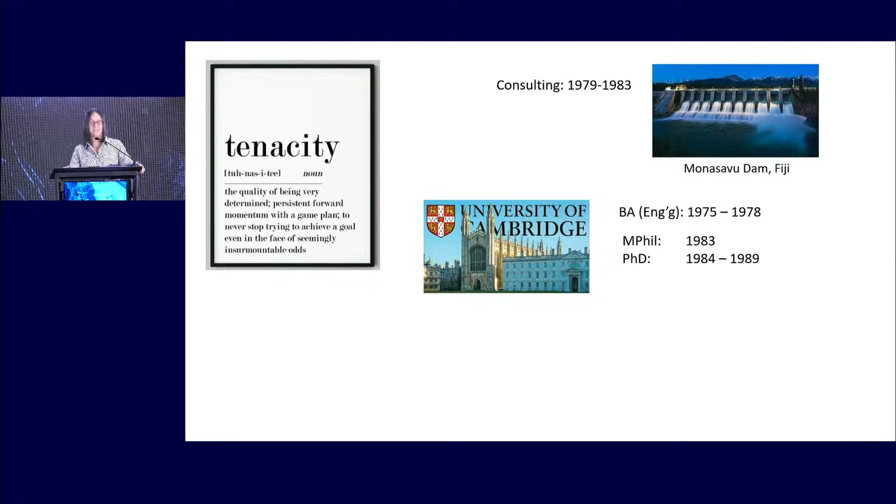Now, you may be aware of the college system in the UK, where you're not only admitted to an academic department, but also a residential college. There have been, for many years, colleges that didn't accept women, and in 1988 the last college to accept women was Magdalene College. That same year, Sarah became the first female research fellow at Magdalene College, where she helped transform that college into the welcoming educational space that it is today.

She stayed at Cambridge as a lecturer until about 1997, where she made what she calls one of her most important career decisions: to leave Cambridge and go to the unknown at ETH Zurich, where she was the first female professor in civil engineering, and from what I understand, also the first and only female professor of geotechnics in Western Europe. So she was really putting her stakes down. Ultimately, she was appointed rector of ETH Zurich in 2015.

Now, this shows her tenacity in the technical world, but she also has another side, and that's the athletic world.

Sarah is an accomplished and world-class triathlete. You didn't know I could use the internet. Look what I found.

She was a member of the British triathlon team. She won multiple European and British triathlon championships between 1984 and 1993. She ran the Hawaiian Ironman triathlon 5 times, coming in 5th in 1985. This is where my colleague Brady Cox, when he first heard me talk about Sarah, said, she's a badass. And that is so true.

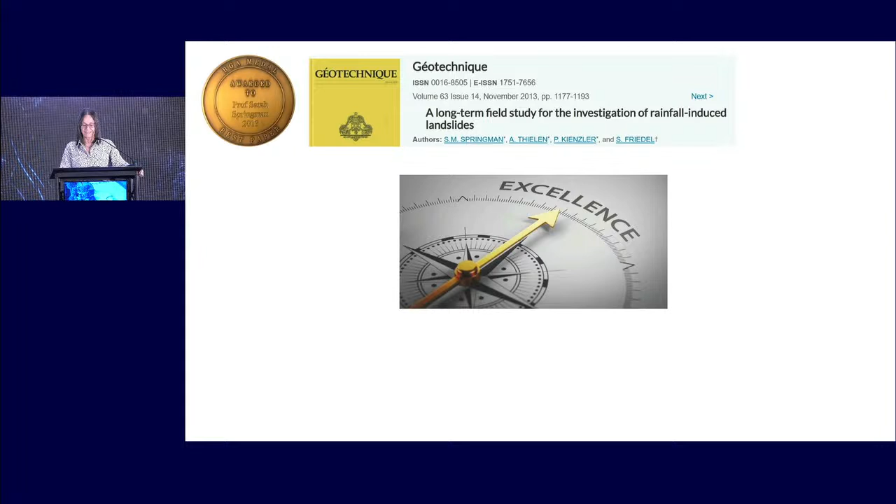Later on, in 2022, she was a co-author on a paper that received the Stephenson Medal from the Institution of Civil Engineers, again working on rainfall-induced landslides. She holds 5 separate honorary doctorates from universities in the UK, Australia, Switzerland, and Belgium. She's been the Cross Canada Lecturer, the Croce Lecturer in Italy, and the other Terzaghi Lecturer in Austria.

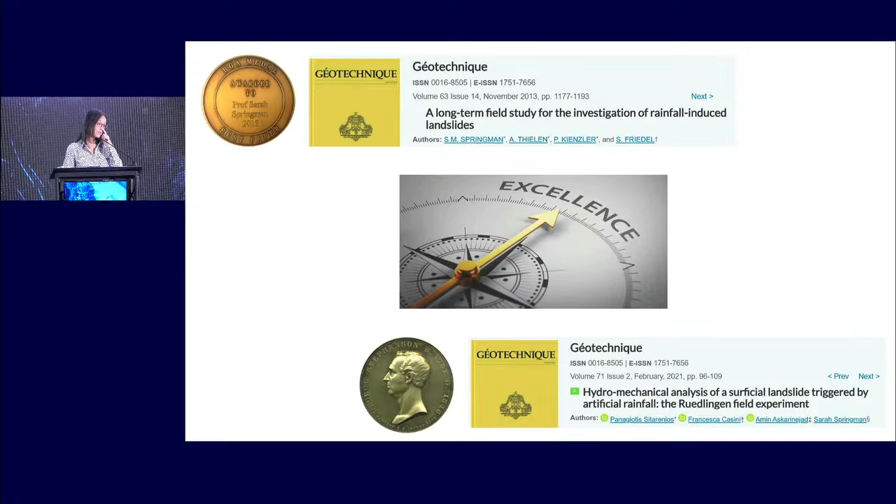Now, I know this is a long introduction, but I have just one more slide, because in putting together this nomination for Sarah, I received the most inspiring letter of support from Professor Andy Take at Queen's University in Canada. He describes Sarah as one of his personal and professional heroes, and much of the introduction information came from his letter. But I figured I'd just simply read the end of his letter.

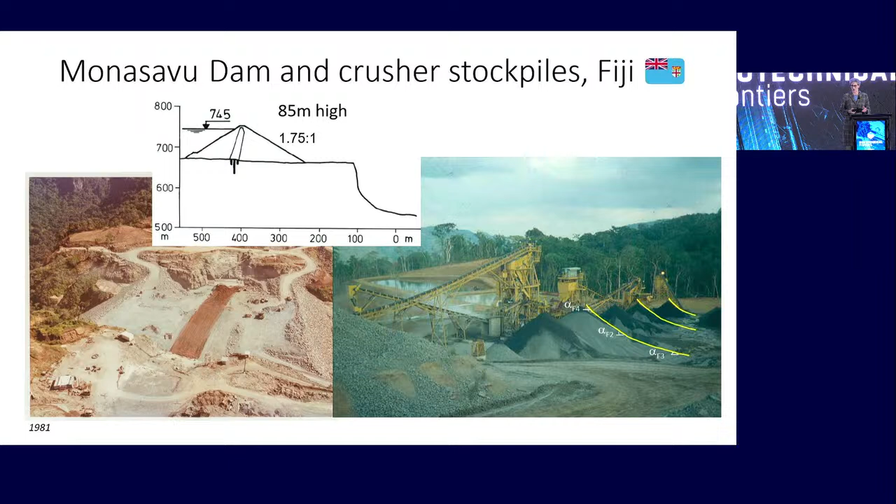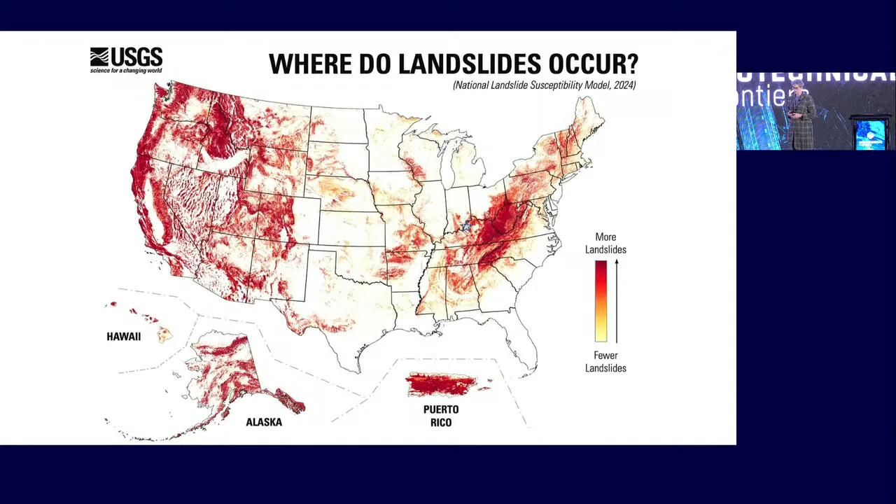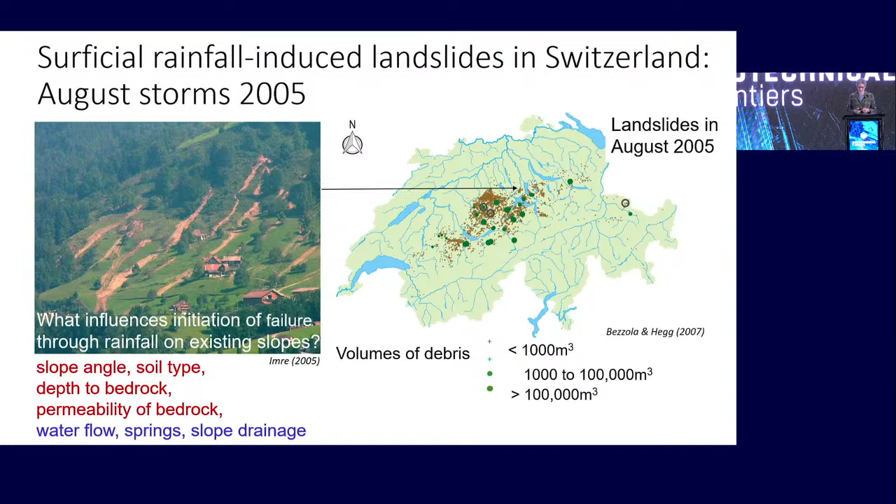What happens to the slope when it rains? And then where, when, and how much of it will fail? These aspects are important, so let's discuss that. And what's the question, and how will we answer it?

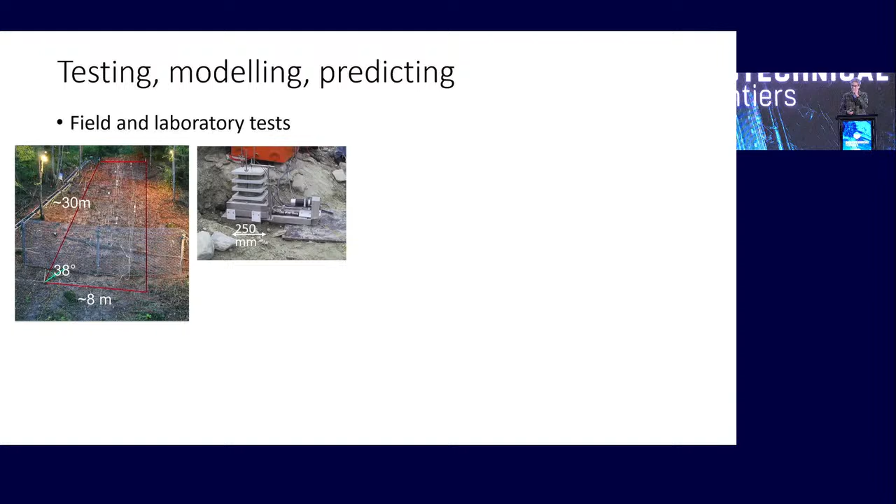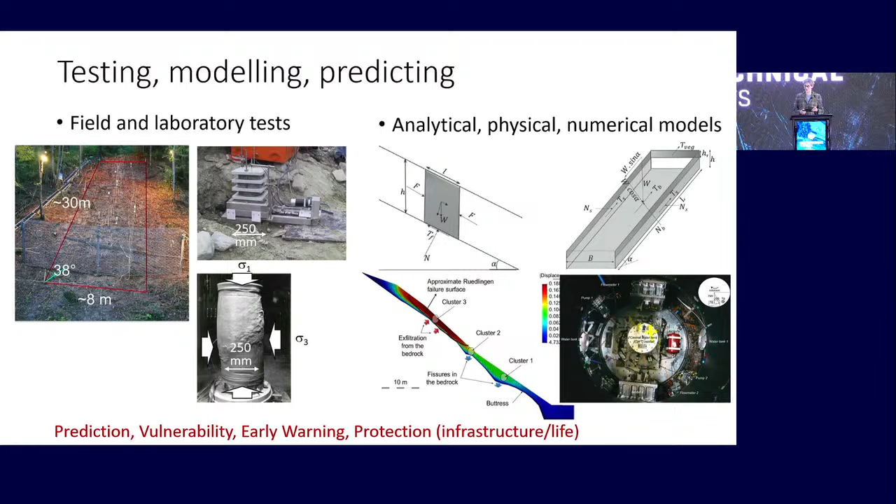I'd like to share what we've learned from field and laboratory tests here, a 38-degree slope, instrumented, in situ shear boxes, large-scale triaxial tests, with analytic approaches, equilibrium, physical modeling, and centrifuge modeling, and numerical modeling as well, to aid the prediction of failure, to be able to design early warning systems, quantify vulnerability, establish risk, and ultimately protect infrastructure and lives.

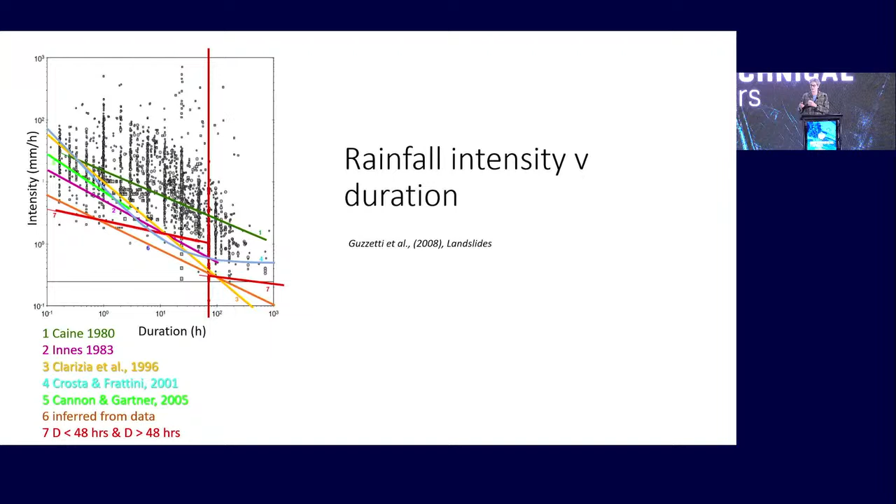The animation shows us basically what's happened. So for probabilistic predictions of rainfall-induced landslides, here are also presented different rainfall duration intensities, completely wet or dry soil, a range of soil depth models, and also statistically based soil parameters. The authors took factor of safety limiting cases using the infinite slope and determined unconditionally stable regions, conditionally unstable regions, and unconditionally unstable regions in red. You can see the trends and the variations depending upon the assumptions.

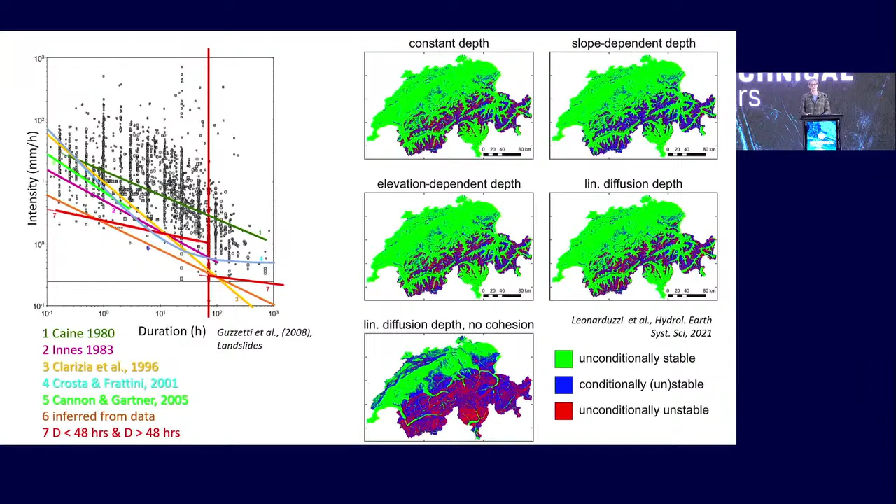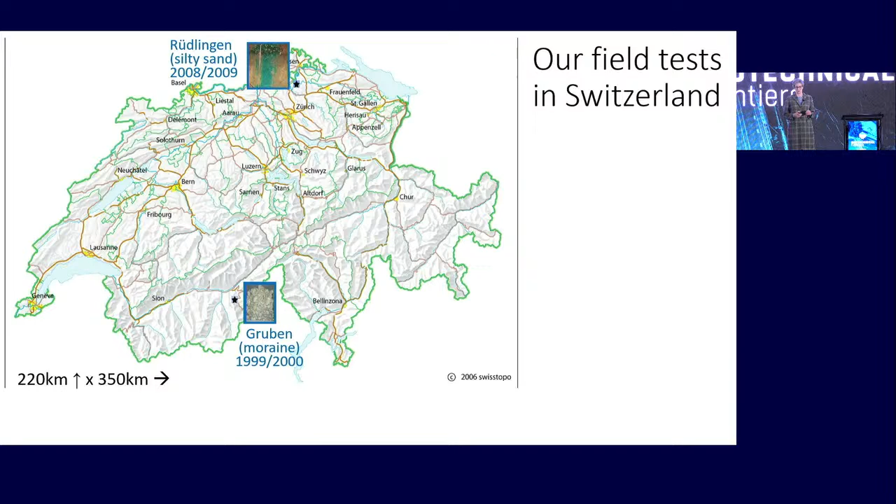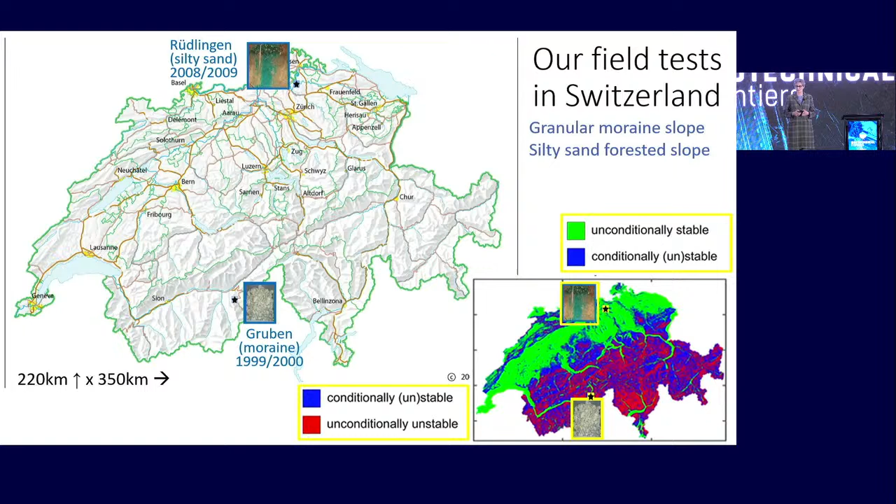I will refer to that later. So my group has conducted multiple field tests around Switzerland. The two main sites I will use to illustrate my points today were each tested over 2 seasons. The first is a granular moraine slope in Gruben, and the second a silty sand forested slope in Rüdlingen. You can see that Gruben is located in the potentially unstable zones, or the conditionally unstable zones, in the south, and Rüdlingen in the unconditionally stable and the conditionally unstable zones in the north. I'm going to mention briefly additional learnings about the influence of bedrock and that of vegetation.

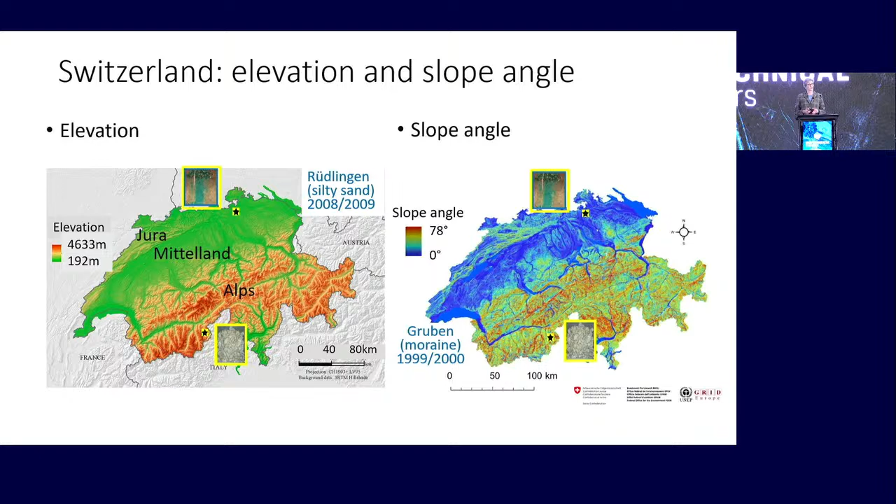2 important influences here relate to elevation and slope angle. We can see the older Jura mountains running from southwest to northeast, and the younger Alps in parallel to the south of the Mittelland, which is shown in green. Gruben is located almost 3,000 meters above sea level on slopes at large scale, steeper than 30 degrees, whereas the Rüdlingen slope is relatively low-lying in the Mittelland and with steep local slopes along the River Rhine.

So let's put this into context. Here we see data records of recent landslides in Switzerland from 1997 to 2005, plotted as a percentage on the y-axis, a number in each group you can see in the legend, against the slope angle on the x-axis. Slope angles vary from steeper than 16 degrees to about 50.

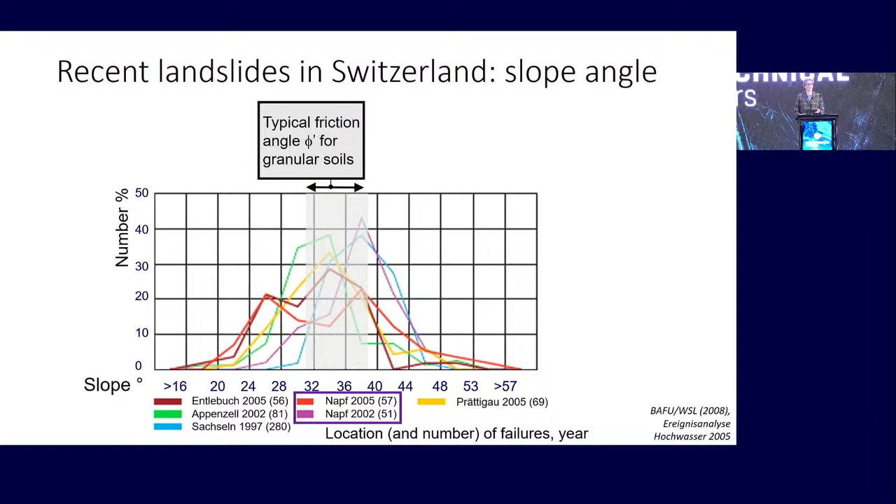One site experienced storms in 2002 and 2005, that's Napf, and trends are similar when you compare red and pink plots. We can observe that slope angles are similar to the typical friction angle for granular soils, whereas some much steeper slopes clearly rely on additional help from vegetation, suction, and cementation. Some shallower slopes fail too, perhaps through seepage in the slope or soils that are fine-grained with clay. In summary, slope angle relative to the friction angle is important, but it's not the only factor.

So let's put this into, let me go back one, sorry, I'm too quick again. Let's do a small digression as a thought experiment in very basic uncoupled soil mechanics. Importantly here, friction is not fiction, whereas cohesion may be. If we have a reliable friction angle mobilized at large strain and shearing at constant volume, phi-CV, then the stress state of an element in a slope in a state of incipient failure might plot as shown in black.

But guess what? This is not always the case. Stress states are often more critical than this, as shown in red, and it would be steeper than an angle alpha equal to phi-CV. So if this slope is stable, then additional strength may be obtained from other sources.

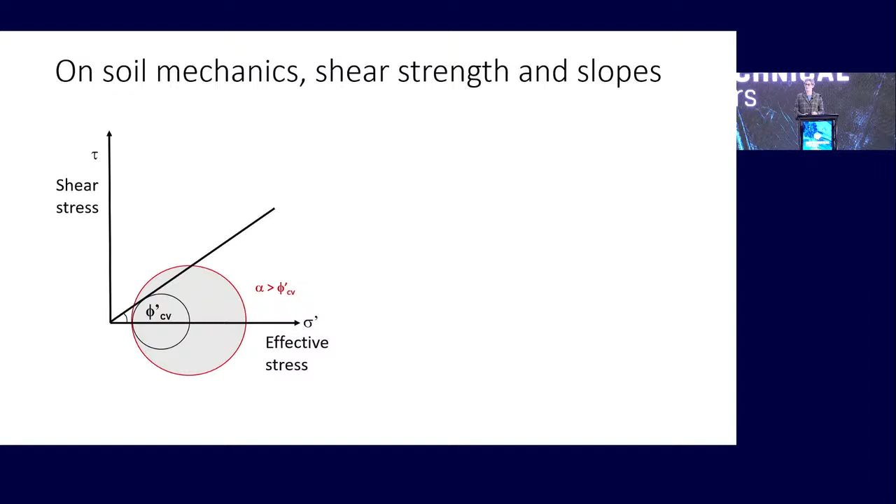For example, if the slope was lightly cemented, then a small cohesion, for example delta C dash, might be mobilized, increasing the failure envelope, as shown in brown. Should there be reinforcement of soil due to roots, then perhaps there might be a delta C dash R, as shown in green. And finally, suctions could also be enhanced by a simplified determination in which the effective suction can be modeled by a delta C star, as shown in blue.

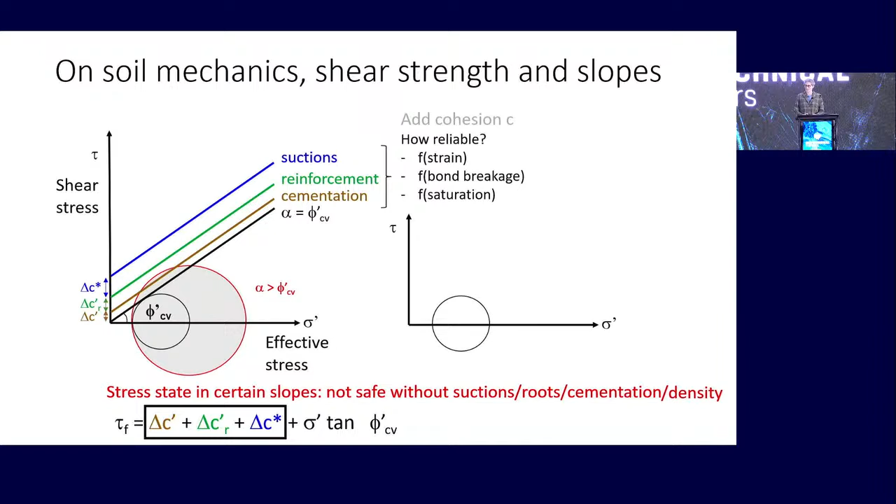So essentially, we have the equation at the bottom there that could be valid, and as such, a net cohesion could be modeled according to this equation. But it's not very reliable, is it? It can be a function of strain, bond breakage, and saturation.

An alternative model might introduce a higher friction angle by an additional value of dilatancy, psi. This could be less likely to model cementation, but might represent the effects of reinforcement and suction. This dilatancy model is also very valid for dense soils. This simplified, uncoupled net failure criterion would then be amended as shown, and can be used with very simple models to make first assessments.

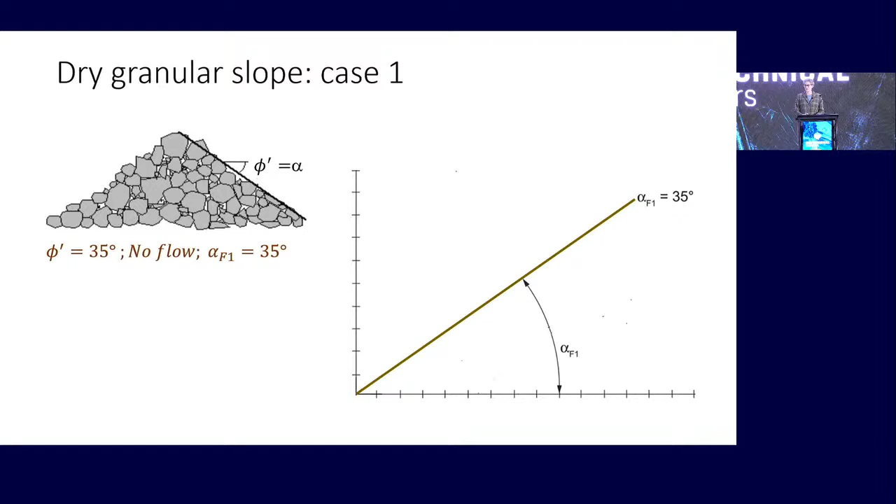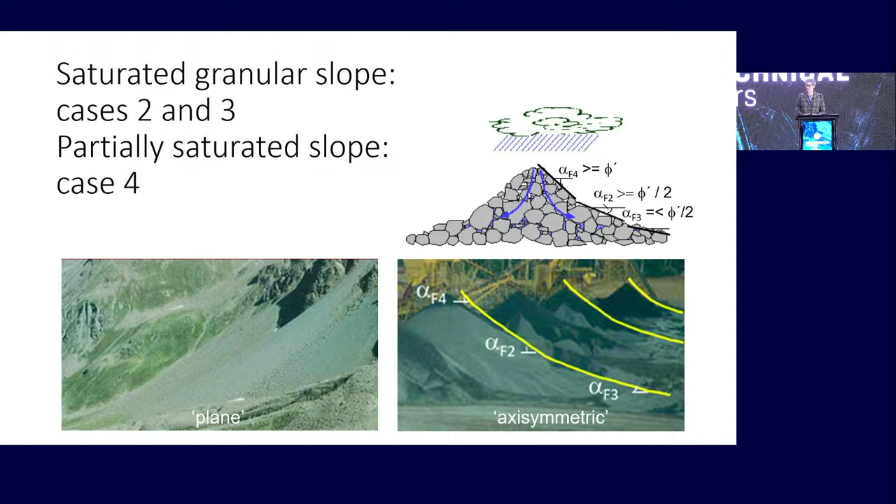So let's relate this to the state of saturation and flow in a slope. We've seen many examples of dry granular slopes representing a mobilized angle of friction, phi dashed. If the slope is dry with no water present, that's case 1, and the angle of a slope in a state of incipient failure is alpha F1 equal to phi dashed. If saturated flow passes through the voids, the slope angle alpha F2 for flow parallel to the slope, case 2, is often roughly half the angle of friction, whereas for horizontal flow at the toe, case 3, the slope angle will be flatter. When the slope is partially saturated, suctions increase, effective stress rises, and the slope angle becomes steeper, identified as alpha F4.

This reminded me of Karl Terzaghi's emphasis on simple formulae for factors of safety in an infinite slope. Imagine parallel flow in a fully saturated slope, with streamlines in blue, equipotentials in purple, and a standpipe in turquoise rising from a shear surface at depth Z2, parallel to the surface, at Z2 cos squared alpha. Now consider horizontal flow with a standpipe rising to the full height of Z2. Assuming no cohesion and a phi dash of 35 degrees, the pore pressure is lower in the parallel flow case than for horizontal flow, meaning the effective stress at a slope in a state of incipient failure is alpha F2 at 19.3 degrees, whereas it's 1.8 degrees flatter for alpha F3.

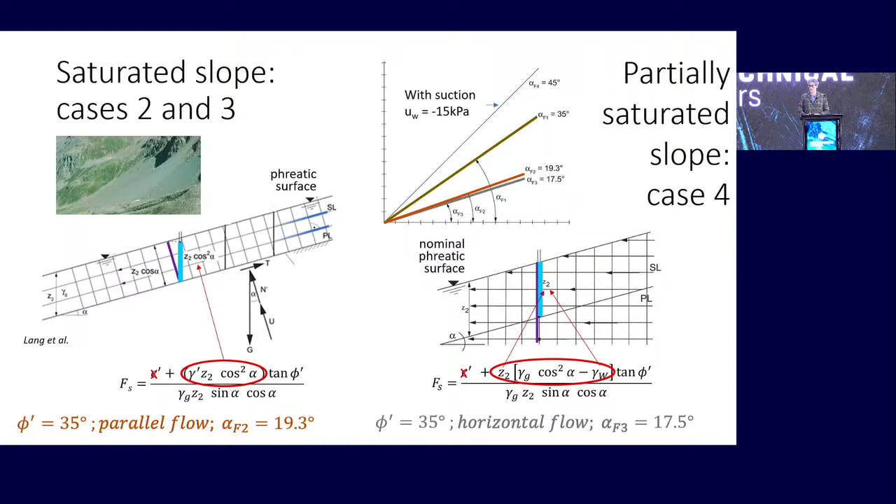Plotted as a slope with respect to the dry case, we can see the respective slope angles. And should there be a suction of 15 kilopascals, then the partially saturated slope angle, alpha F4, goes to 45 degrees.

Now considering the interface between saturated and unsaturated flow, let's look at how the slope saturates, leading to a rainfall-induced landslide, through preferential flow perhaps, or through infiltration. In an excavated infiltration test conducted by postdoc Peter Kienzler, the northern site shows preferential flow through root holes, largely with partially saturated soil around that had not been dyed blue. This leads to the water table building up from the bedrock at depth, called bottom-up saturation.

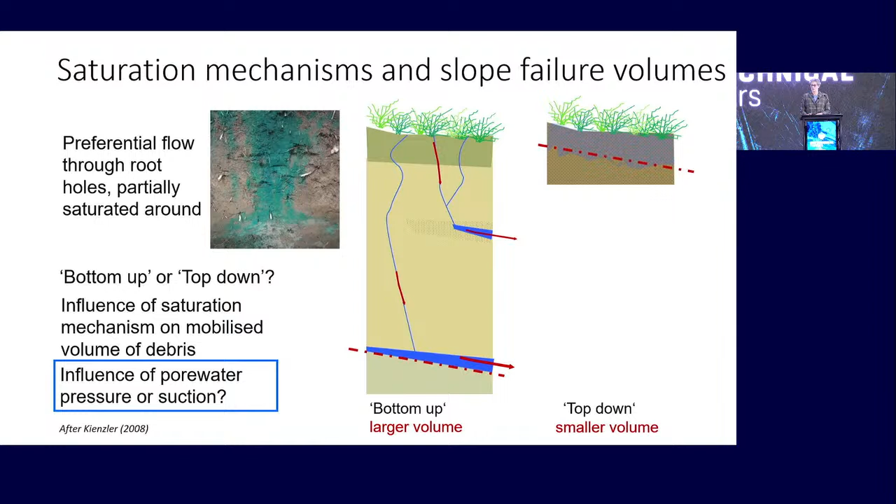Should rainfall infiltrate and saturate the soil from the top down, this influences the mobilized volume of debris, which is much smaller for top-down saturation than for bottom-up saturation. The larger volumes also often run out further, making them more dangerous. We'll see both of these mechanisms in the two field cases, and this affects whether we're talking about suctions or pore water pressures in the main soil mass as well.

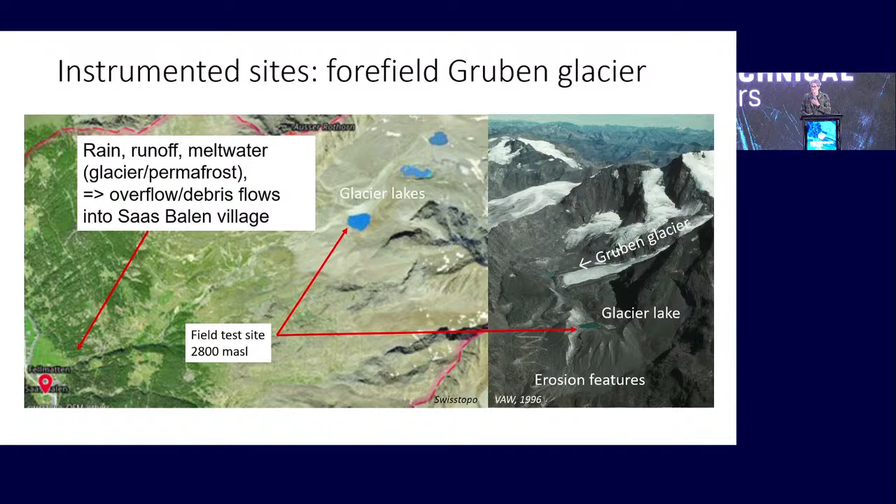So now to the south. The Gruben Glacier, shown on the right-hand side, has retreated markedly, leaving behind a moraine bastion in the forefield with several glacier lakes collecting summer meltwater. These have overtopped the moraines and led to severe debris flows in Saas Balen village in the 1960s, before control weirs were constructed. Philippe Teysseire was charged by the canton's geologist to investigate slope stability in moraines, and this became his doctoral research project.

Here's an elevation of the moraine bastion and the slope in the forefield to the Gruben Glacier. The soil conditions were extremely heterogeneous, but there was a significant fine fraction that retained suctions. We wanted to link saturation, water flow, slope stability, and debris volumes mobilized due to rainfall.

We instrumented two slopes to determine saturation degree, measure suctions and rainfall intensity, among other quantities. Water fed flowed from the glacier lake above, and it was a very challenging environment at almost 3,000 meters above sea level. The test area on the 31-degree slope did not fail in either '99 or 2000, whereas a smaller one on a 42-degree slope failed sufficiently.

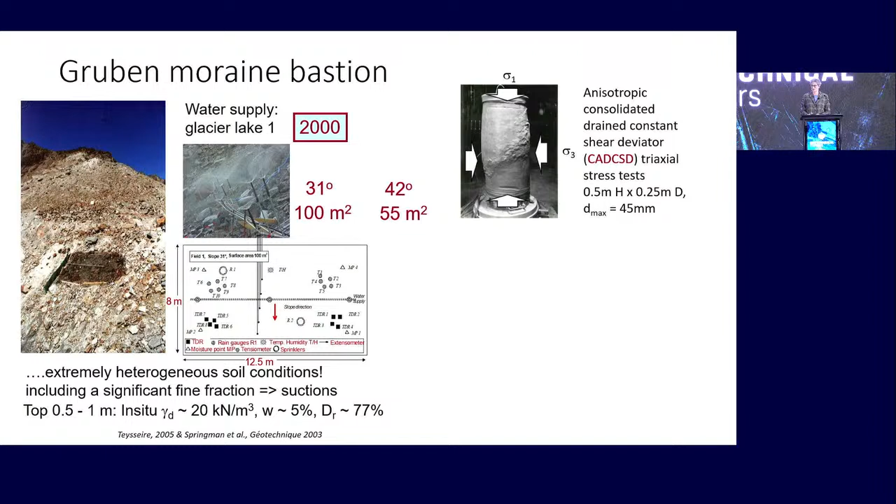We investigated the angle of friction on reconstituted specimens in large triaxial tests of 250 millimeter diameter, with maximum particle size of 45 millimeters, conducted to model increasing pore pressure with an anisotropically consolidated constant deviator stress path, and then in-situ shear tests on naturally unsaturated soil, with friction angles ranging from 39 degrees in the triaxial test to 41 degrees in the shear box.

And of course, that explains to us exactly why the 31-degree slope was safe and the other not.

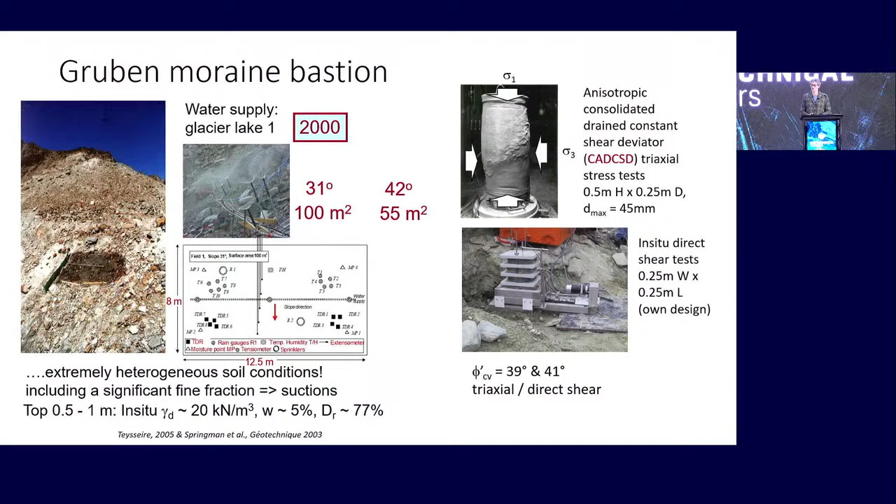One of my colleagues said, 'Sarah, what, you want to bring the mountain down?' He was a hydrologist, because it was more than the 1 in 500-year storm. I can't do the Italian accent very well, I apologize.

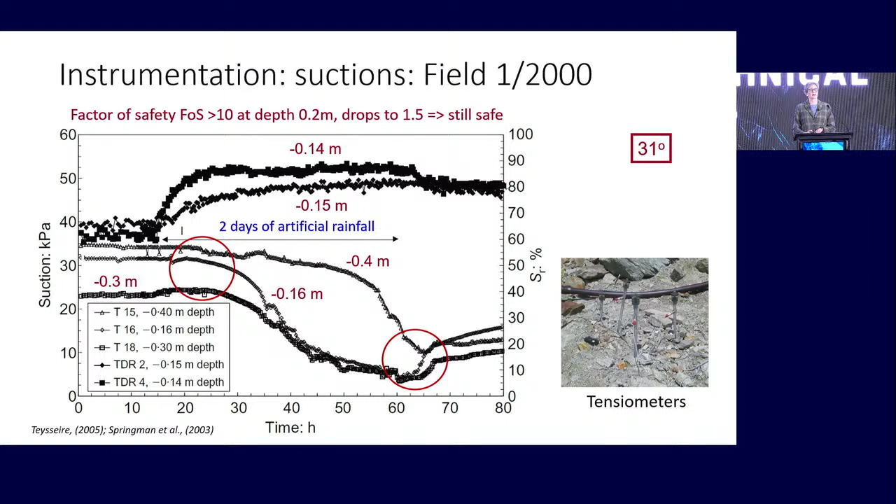Here we combine data showing saturation degree, almost reaching 90% at 14 centimeters of depth after 2 days of rainfall in 2000 for the 31-degree slope, and suctions from tensiometers installed up to 40 centimeters below ground level. Suctions were 25 to 35 kilopascal before rainfall, and as expected, the shallower devices responded first. Infinite slope stability calculations show a factor of safety of 10 dropping to 1.5, still safe, with 5 to 10 kilopascals of suction at the end of the rainfall event.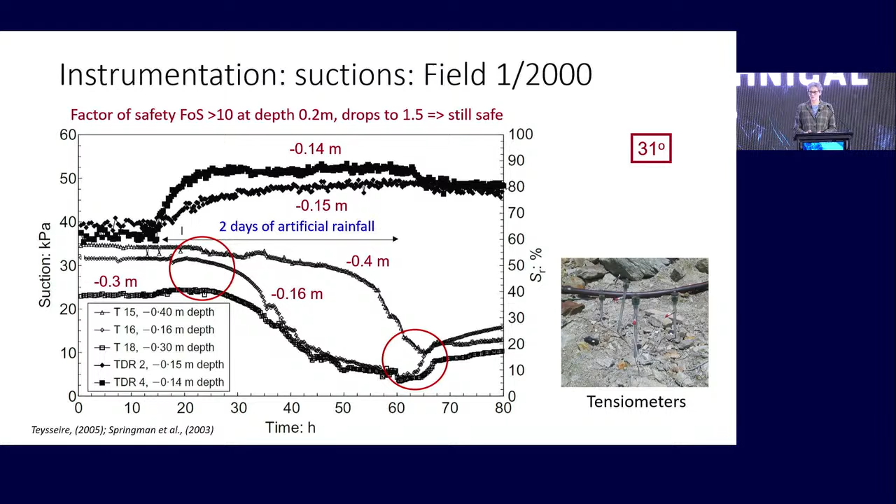But now for the saturation degree in the steeper slope, derived from the TDR instruments, values of 85 to 98% were reached. The safety factor for an infinite slope was 7 at the beginning, before rainfall, and dropped to 1 at the point of failure, after 2 days of rainfall, with just under 1 meter of rainfall in total. So to summarize, for 1999, taking the moisture point and TDR data over 1.2 meters depth...

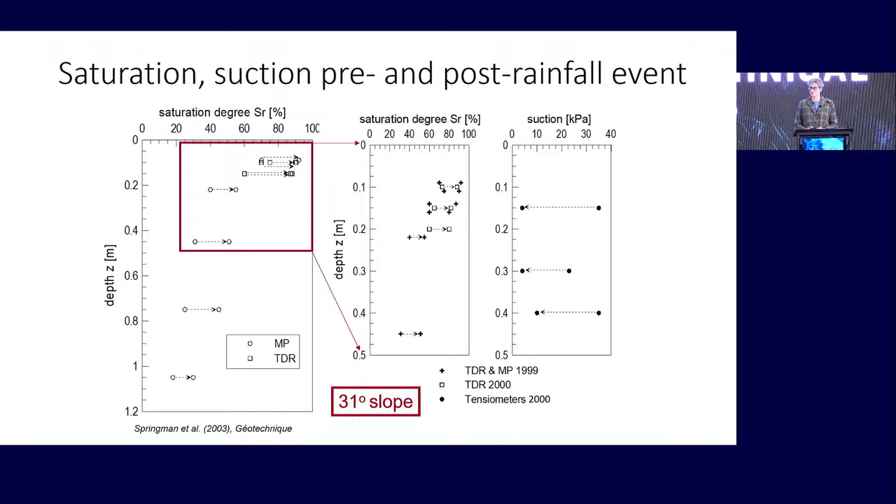We see reduced saturation with depth, nonetheless increasing with rainfall, and the same is replicated across the top half meter for both years, and for suction in 2000. As a result, the factor of safety obviously will have dropped.

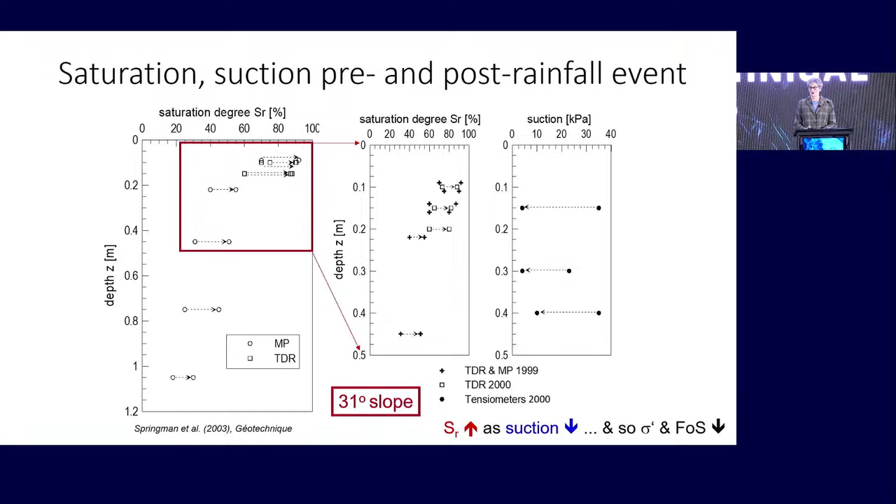Given the need to quantify shear resistance in situ, we designed, constructed, and instrumented a large-scale portable direct shear box. How we carved the unsaturated, nominally undisturbed specimens in situ, 25 centimeters square in plan, and placed the box over them are described in papers and in Philippe's thesis.

Weights were applied to represent surficial stresses, normal stresses ranging from 13 to 33 kilopascal, and normalizing the shear stress tau mobilized against the large strain shear stress tau u, plotted against dx, shows remarkably similar traces for 5 tests on moraine. When excavated, weighed, and graded post-test, they gave us a saturation degree of approximately 50%.

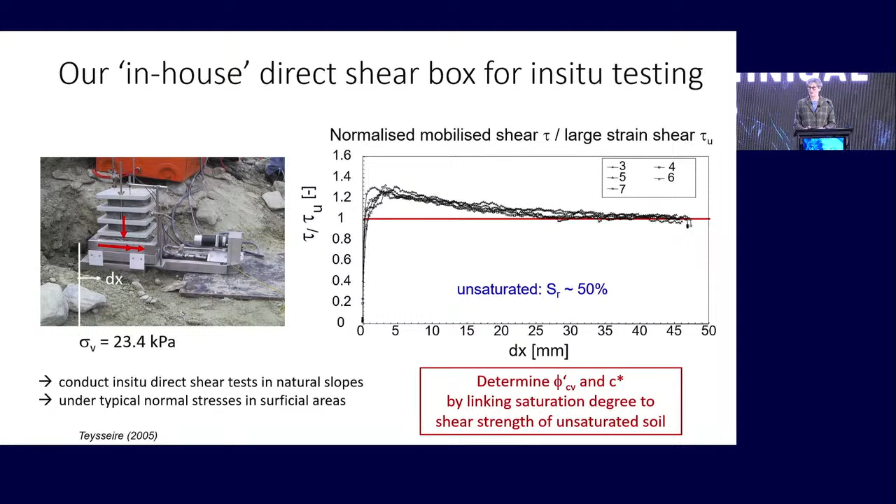We wanted to determine shear parameters, obtaining C star to link saturation degree to mobilized shear strength. Here I must mention the valuable collaboration with Cristina Jommi as we analyzed large strain mobilized shear stress at failure, tau F, plotted for natural specimens with average saturation degrees of 50% and 70%.

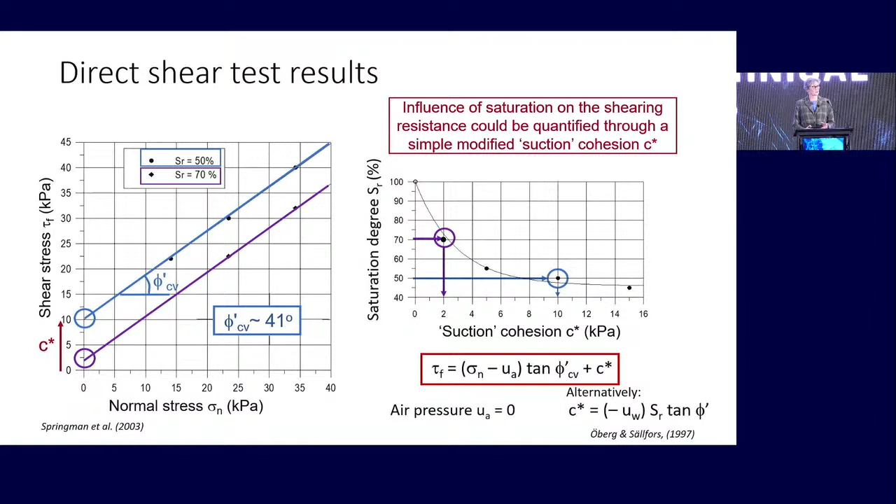At 50% saturation, the locus of failure points is linear, indicating phi-CV is 41 degrees and C star 10 kilopascal. The locus for 70% can be drawn parallel to this, but with a lower intercept C star of 2 kilopascal. A curve can then be fitted to the saturation degree and C star due to suction, taking this data and two other data points, and assuming C star is 0 for saturated soil, with the relevant equations prescribed.

Combined in simple practical models, applying this to infinite slope conditions for superficial failure, we can determine a critical value of C star at FOS of 1 as a function of unit weight, depth, slope angle, and friction angle. And then what friction angle should we use, having conducted lab and field tests?

We can check what C star would be mobilized at the depth of failure of 20 centimeters on the 42-degree slope, and input friction angles to see that the C star required is in the 0.1 to 0.2 kilopascal range. Comparing against the C star SR plot from the shear box data, we obtain the relevant intercept C star for 95% saturation, and bingo, it agrees really quite well. This is just a very simple model, but actually, in this case, it worked remarkably well.

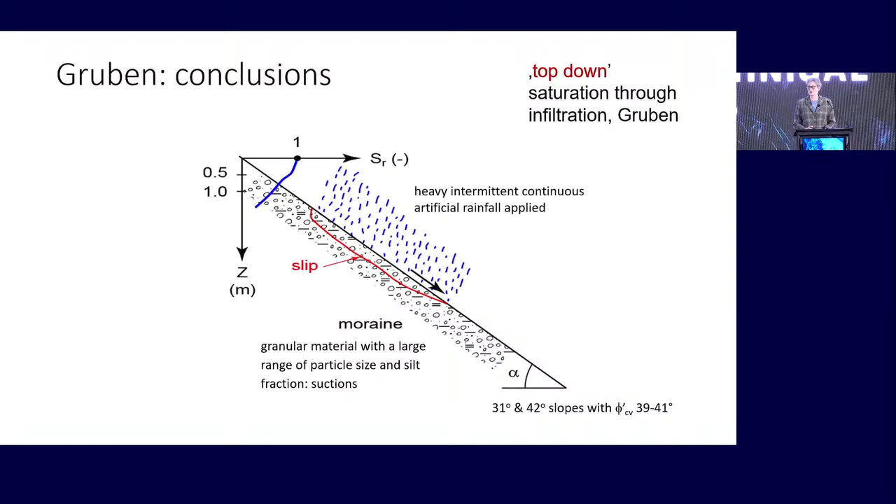So what did we learn from Gruben? Saturation mechanisms after heavy continuous rainfall show very shallow infiltration into moraine, top down, with suctions and factors of safety reduced accordingly, leading to a very superficial slip.

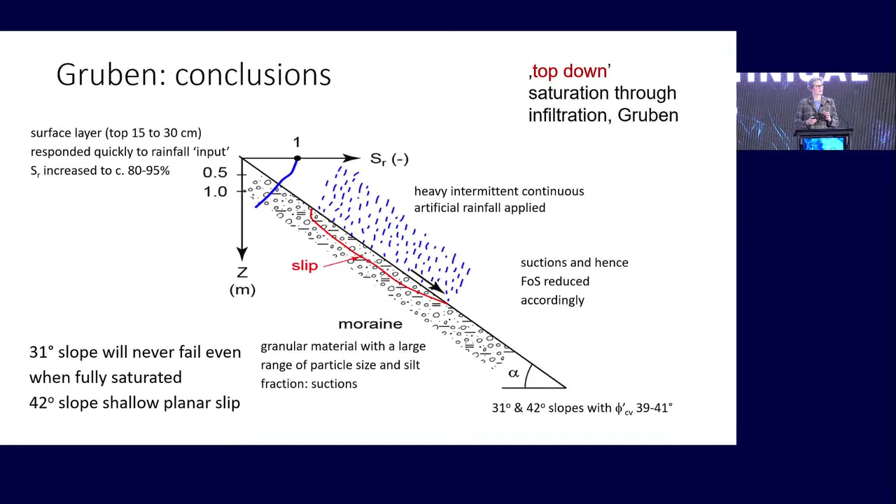But how much of this can we predict? Predictions of the size and extent become feasible with simple models here. Angle of friction and slope angle are relevant. Scale is important, but precisely when will the failure occur? That's one of the big questions we have to ask and answer.

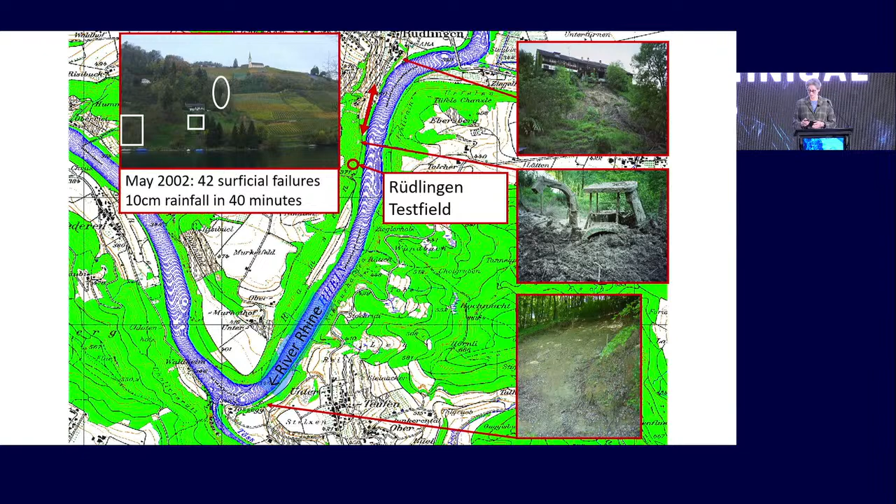So now to the north. This area along the Rhine near Rüdlingen was susceptible to surficial landslides. 42 occurred in 2002 with net damage of over 1 million Swiss francs. We wanted to explore why and needed a field site that could be instrumented, monitored, and brought to fail safely.

Being aware that roots reinforce the ground, we searched for a suitable site, notionally steeper than the friction angle of the ground, but with hints that the slope might fail, indicated by the downslope creep evidenced through the curved tree trunks. Bedrock was seen outcropping to the top right nearby, and this was part of the TRAMM project within the CCES project from the ETH Council.

6 doctoral students and many postdocs worked on the project at many times. The topographical features along the Rhine River Graben indicate slope instability. You just have a look at it, it's obvious.

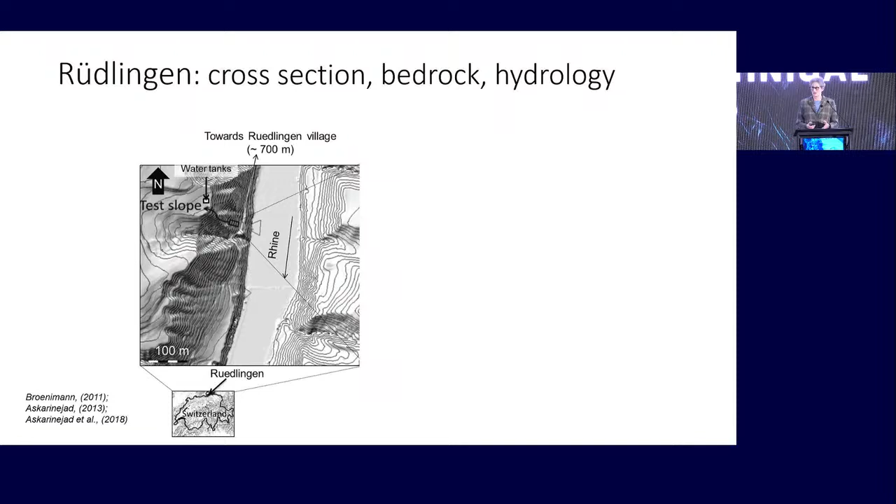Ground and geophysical investigations were then carried out, including dynamic probing, excavation of test pits, sampling, top of bedrock permeability tests, electrical resistivity tomography, and a borehole. Soil depth to the bedrock was found to be variable, 1 to 5 meters, with fissures in the horizontally layered bedrock in the underlying marlstone running parallel to the river, and porous layers in the sandstone above.

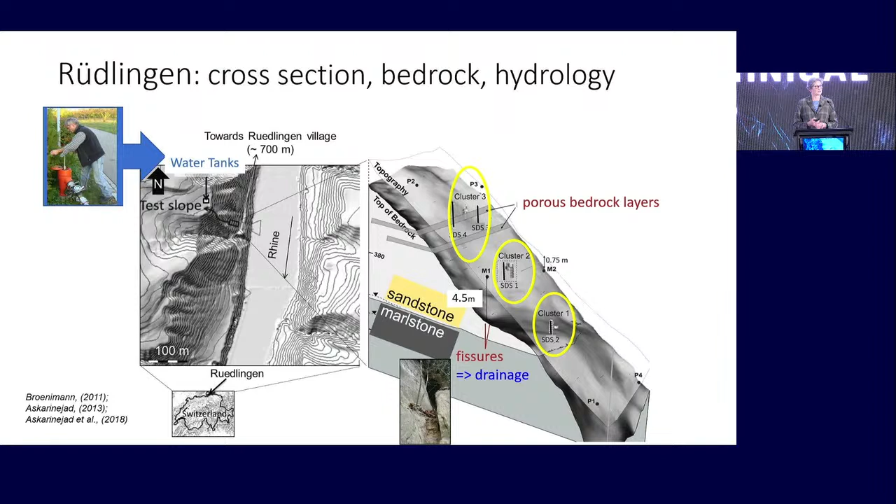3 clusters of instruments ringed in yellow were installed, and an artificial rainfall was applied to the site via a hydrant, hoses, and sprinklers. The bedrock played a really important role with a buttress at the toe and through drainage and exfiltration, all of which affected the slope's response to extreme rainfall.

Instrumentation in clusters included devices to measure volumetric water content, suctions, earth and water pressure. We had meteorological and hydraulic measurement systems, and we had steps, lights, and a net to protect the road, and we videoed surface movements and quantified them through photogrammetry.

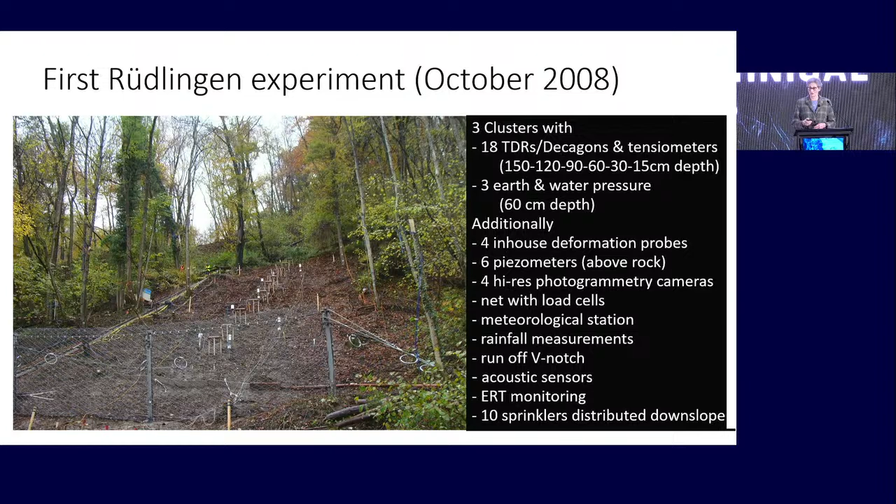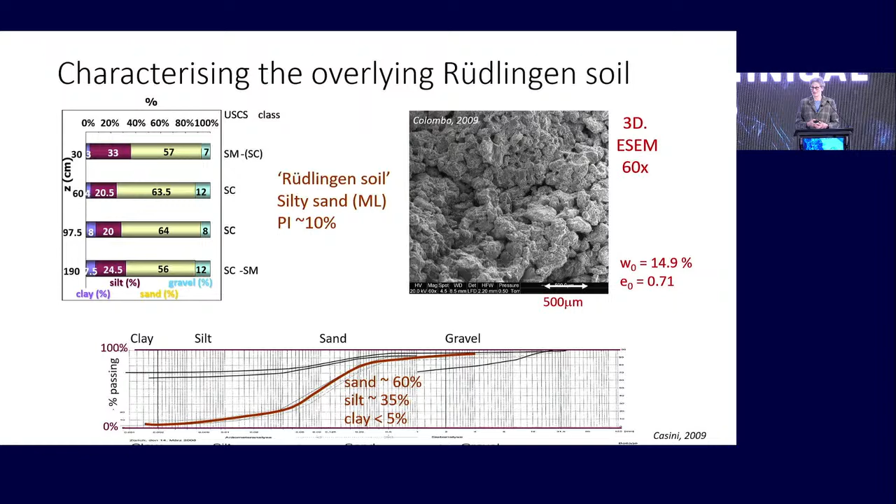The soil mantle was surprisingly uniform colluvium with some clay and gravel. Samples obtained from the test pits were characterized. You can see the so-called Rüdlingen soil that we used later on for subsequent testing in the lab, largely led by postdoc Francesca Casini. The clay fraction was scanned and found to contain smectite, but it didn't have much effect, actually, in the end.

There were shrubs and trees and grasses. Schwarz quantified root reinforcement then through pull-out and tension tests in the test pits. 1 to 2 millimeter diameter roots tended to pull out, and the 3 to 6 millimeter ones failed. He constructed a map of the root cohesion on the site, which was delimited by the 6 red dots, and we can see many trees shown in brown, bordering the site and in the lower part.

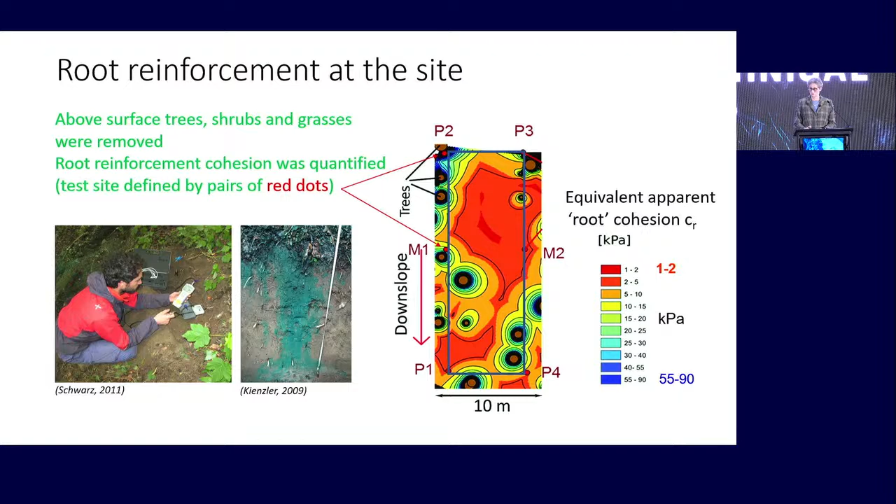So any future instability was expected in the upper part of the field, with a cohesion due to roots of about 1 to 2 kilopascal.

Safety on site is essential. Ensuring that access was controlled according to the state in the ground at the test site, I set up a control structure with clear responsibility with internal and external communications based on this graph delimiting safety condition indicators. The cutoff that closed access completely on and immediately around the site was the saturation degree of 75% and higher, or a suction of 7 kilopascals and lower.

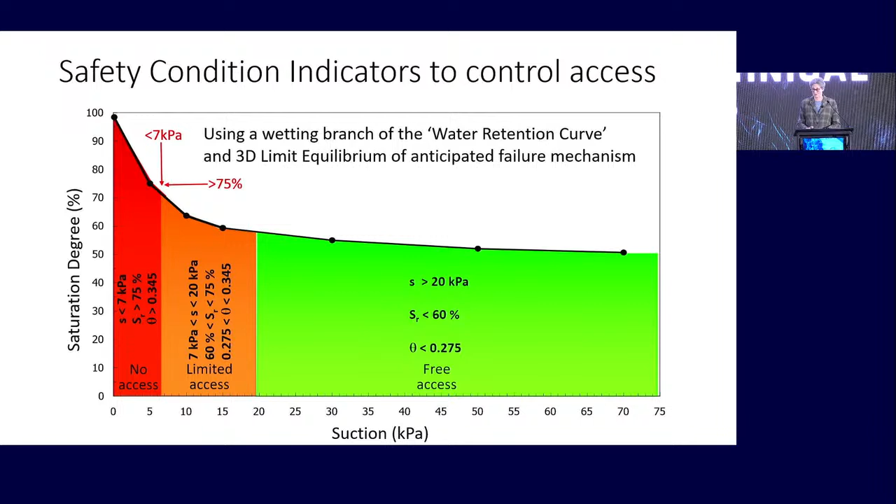It worked. All of the doctoral students came home afterwards. That was important. And it would have been my fault if not.

An artificial rainfall event was organized with sprinklers distributed evenly down the slope, and double the annual rainfall was delivered over 4 days at an intensity of 10 to 40 millimeters per hour, with minor deformations observed in the top right of the field, but no failure. Given the fissures in the bedrock at the bottom of the field, this was akin to trying to fill up the bath without the plug being in it.

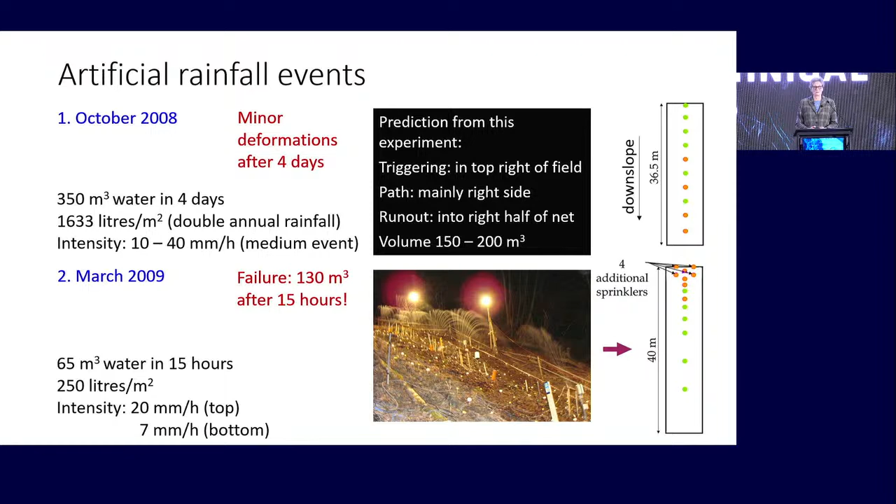A second experiment was conducted 6 months later with sprinklers located in greater concentration in the upper part of the field, and roughly double the rainfall intensity at the top led to failure after 15 hours. We learned a great deal from the first experiment and applied this to the second, and I'm now going to show you just a little bit of data.

The landslide debris sheared past deeper lateral roots from the shrubs on the right-hand side of the field, which had been cut down to 0.4 meters depth, and some roots broke too, as you can see from the picture.

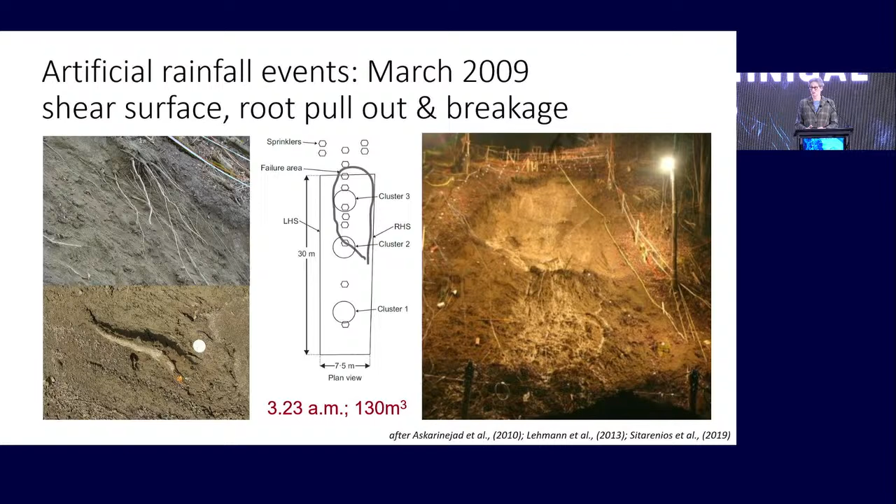Evolution was possible through photogrammetric analysis of the photographs, reported by Devrim elsewhere, and the final erosion scar is shown in the upper part of the field on the right-hand side as predicted, following the border on the right-hand side in the shallower soil. Debris was deposited safely in the bottom part of the net, 130 cubic meters.

So what did the instruments tell us? Well, the pore pressure was negative at the beginning, with suctions down to 1.5 meters depth.

The rainfall coincides with top-down saturation for the first 3 hours or so, but by 6 hours a water table has built up from a depth of 1.5 meters with a height of 0.8 meter, or 8 kilopascals of pore pressure there. At the same time, the volumetric water content increases and shows probable saturation by 6 hours at the 0.6, 1.2, and 1.5 meter depths.

Thereafter, the saturation mechanism seemed to continue bottom up.

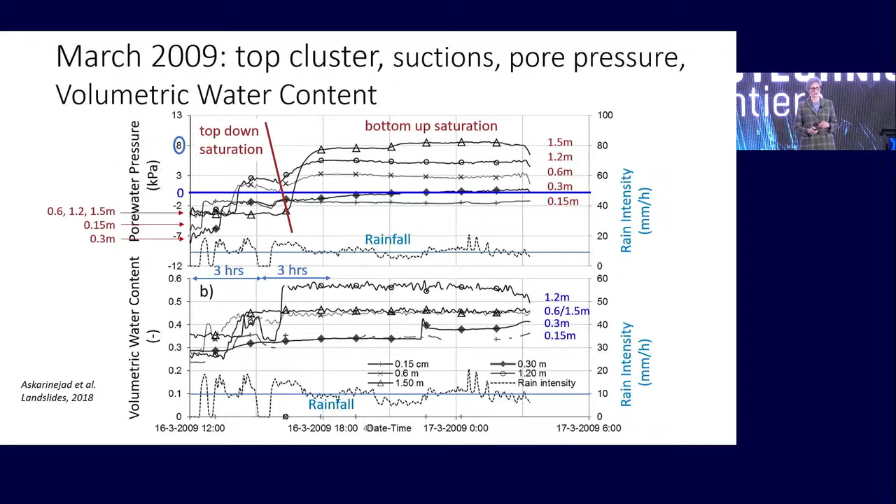I wanted to be able to determine the depth to a slip surface during the experiment, and wondered whether instrumenting a strip with strain gauges and calibrating the probe to measure bending and hence lateral deformation might work, and could find a use in future early warning systems.

Armin, now a professor, Askarinejad, was the lead doctoral student for the whole project, and together the team designed, manufactured, and calibrated, installed 4 probes, of which 4 functioned really very well.

Deformation probe 4 was installed in the top left of the field to a depth of 2.5 meters, where it was cemented into bedrock, and a time trace of the deduced lateral deformation is given from 4:25 p.m.

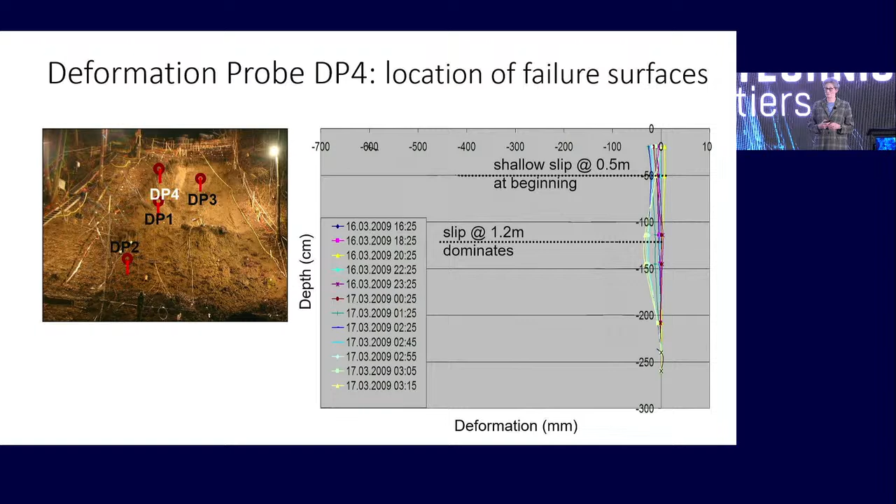and continued until failure. We can see the deformation building up with time, and a shallow slip developing at 0.5 meter depth, for a more major one started bulging at 1.2 meters of depth with a sudden acceleration to failure over the last 10 minutes.

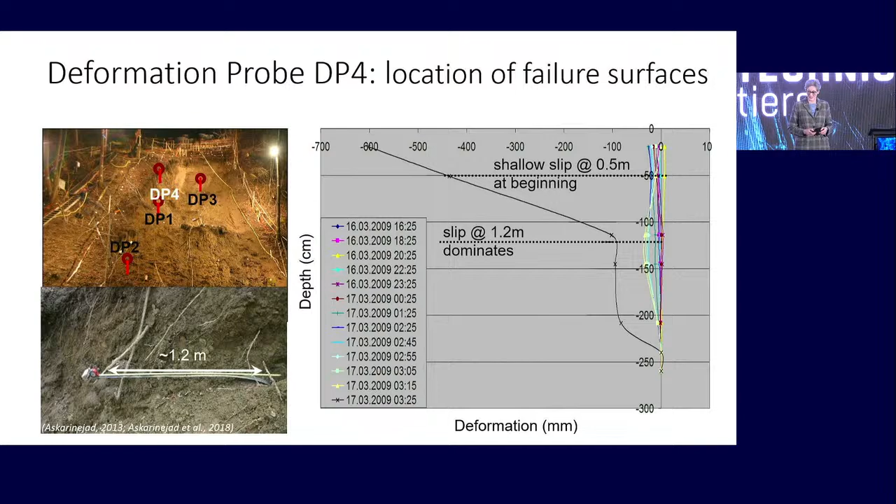While good indications have been given by this instrument, not enough warning would be possible for anyone to give time to escape, unfortunately. So let's have a look at the... roll it, David, please.

This is the first video, which shows the pictures of the landslide every 1.5 minutes.

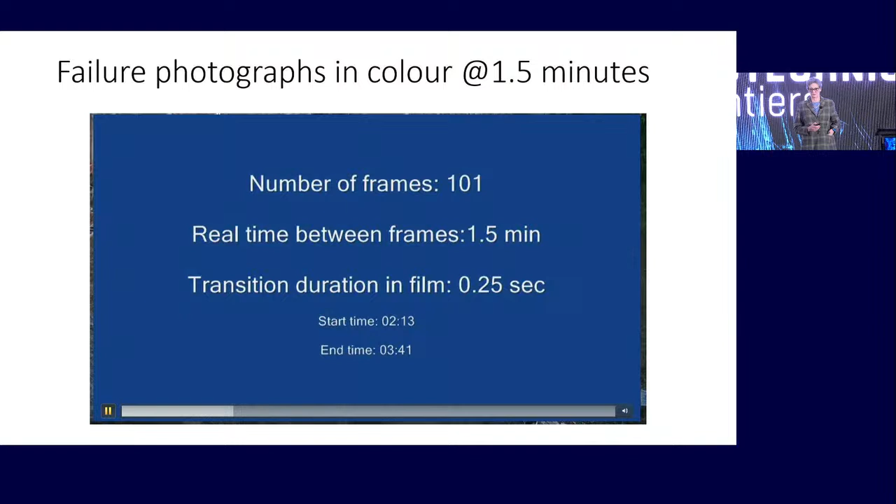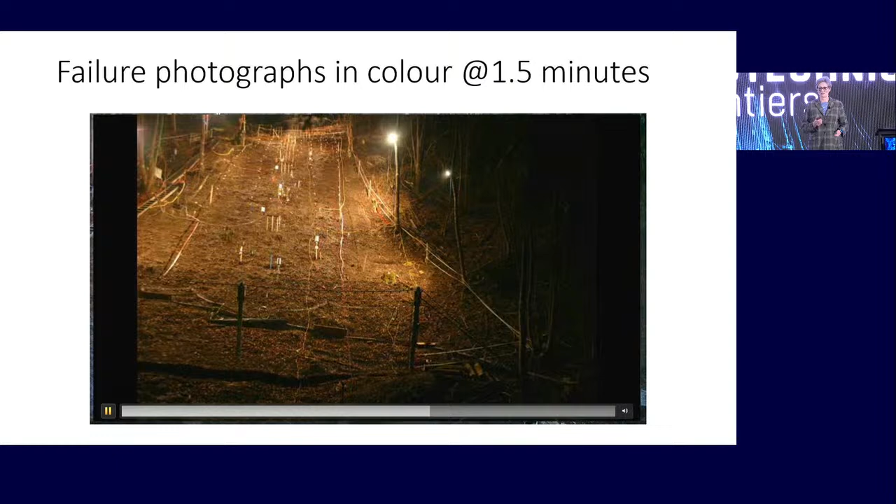These are the color pictures, and you'll see how quickly the slide develops. You're going to see rainfall, you're going to see lights, just a typical Swiss slope here, really, isn't it? And it rains and it rains and it rains, and then look at the top right of the field, and you're suddenly going to see a tension crack opening, and all of a sudden, boom, and it's down in the net.

So that's why no doctoral students were allowed to be on the site at that time. Can we roll it again, please, David? This is the black and white version with 0.23 seconds between each photograph.

So you can see exactly how the slip develops. You remember we had a tension crack up at the top, and then it sheared away from the vegetation on the right side, sheared, rotated and sheared a bit, translated, and that was the first 36 seconds.

And all of a sudden, here you see it going. Look at the water coming out at the back, the exfiltration, and then it accelerated into the net over the last 12 seconds. Essentially, it became a debris flow at that moment in time.

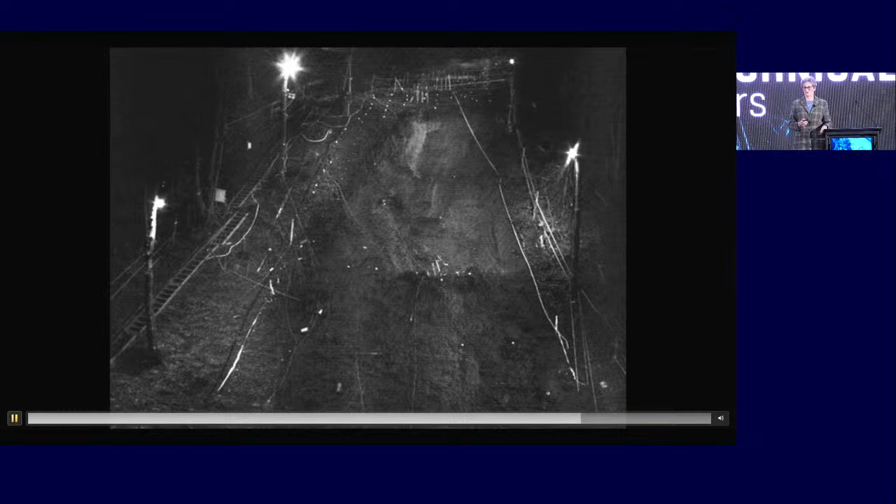It reached a maximum speed of about 3 millimeters per second, and detailed vectors were possible from the wonderful photogrammetry, which I haven't, unfortunately, had time to show you today.

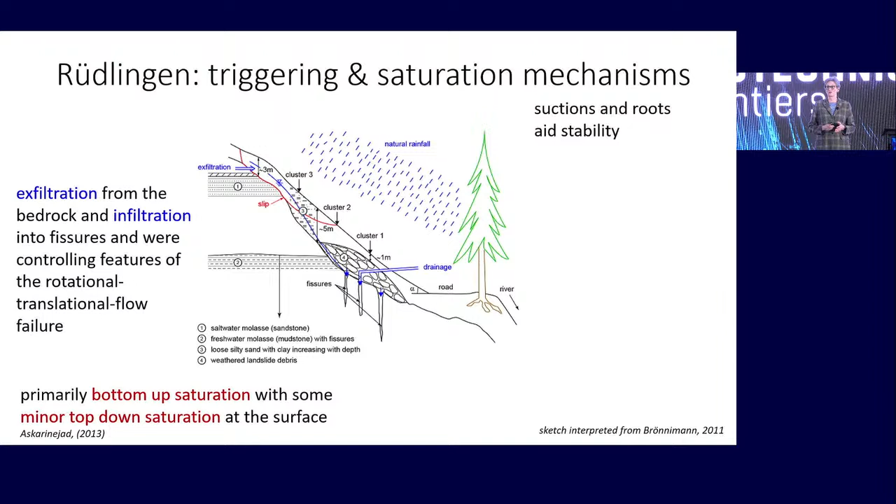So here's a sketch describing the interactions, and we can see that it was primarily bottom-up saturation in the upper part of the field, with some minor top-down from the rainfall. We had mainly exfiltration in the upper part, controlling the behavior, with the drainage down in the bottom by the buttress. We could see precursors of movement from a couple of hours before the failure.

However, at the end of the day, what worked really well was remediation at the beginning with perhaps deep-rooted vegetation, and by draining the slope; leaky bedrock is especially effective in this case.

I'd now like to move on to some other learnings from physical, analytical, constitutive, and numerical modeling, starting with the effect of bedrock on the stability of the soil mantle.

Amin and our technician team designed and constructed a climate chamber and a rain simulator to test our hypothesis, building on work after Andy Take. We studied the effect of bedrock shape and hydrogeological interactions with the overlying mantle of the Rüdlingen soil, compacted to 2 meters of prototype depth on a 38-degree slope.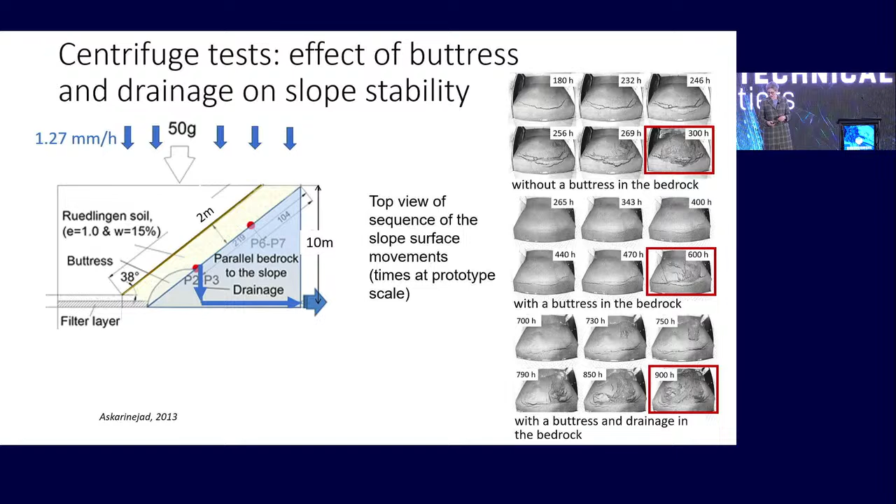So that was very helpful, really.

Complementary learnings about the role of bedrock shape and permeability stimulated further physical and numerical experiments modeling a steep scree slope in southern Switzerland, conducted by Daisy Lucas. One concern that emerged was a bedded geological strata with different depths of cover when exposed to groundwater flow in the scree.

During storm events, the graph shows us the longer the base of the step, x2, and the higher the step, the lower the water flow Q required to reach sufficient failure. That's what it looks like in the numerical models and in the centrifuge.

We can see water forming a spring over the shorter and the longer steps. We can see very minor scars in the centrifuge for the shorter steps, and much longer failure zones over the longer steps in the pictures below.

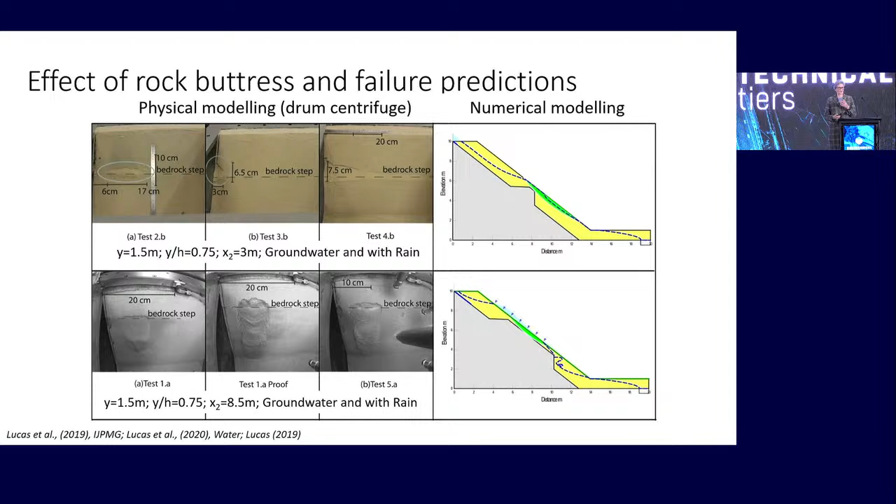So the message here is be very careful what you wish for. Buttresses might be helpful, and drainage is very good, but exfiltration and saturated flows sometimes bring more of a challenge.

So now other learnings from vegetation. What about the vegetation? The contribution of the roots to the shear strength was quantified using a multi-stage direct shear test and in a slope model in the centrifuge by Amin.

Simultaneously, roots were planted in the shear box and in the model box using the reconstituted Rüdlingen soil in the same room and tested on the same date, so we didn't have any time effects on the growth of the roots.

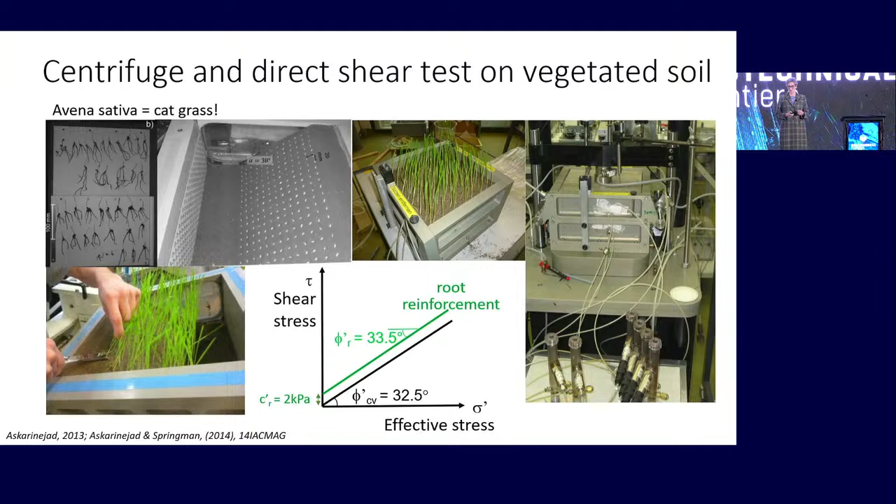Surface movements of the vegetated slopes showed faster initial movements, which decelerated as the root reinforcement mechanism was activated. This was also seen in the direct shear results. The slope was stable for the entire 1,800 hours at prototype time of the rainfall, so the reinforcement really helped here, with a c' of 2 kilopascals and a phi dash increase by 1 degree to 33.5 degrees.

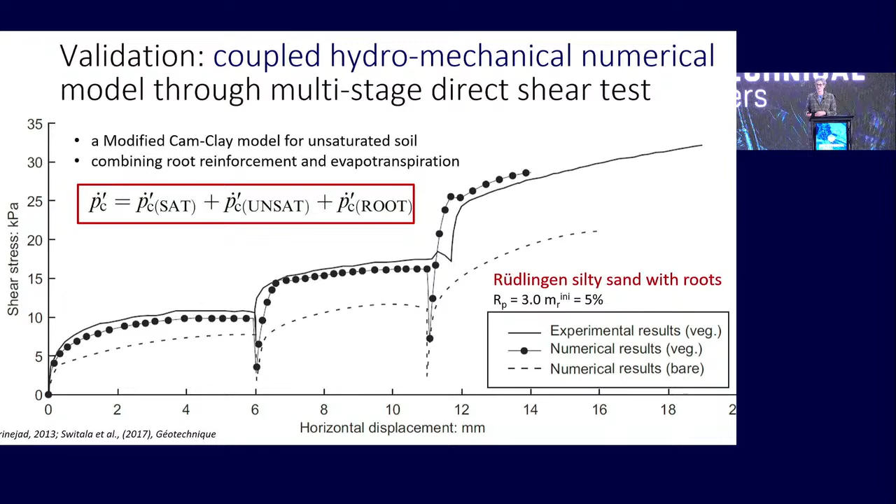The pre-consolidation pressure was defined according to increasing volumetric plastic strains, wetting or drying of the soil, and the mechanical root reinforcement. This three-stage direct shear test could be modeled quite effectively — shearing, unloading, reloading, with and without vegetation — so possibly this could be a useful model to incorporate in a finite element program later on.

Zooming out to the big picture, based on another project we joined with the Wald, Schnee und Landschaft group in Switzerland, we tried to quantify the effect of protection forests on slope stability. We can see here the difference between the pasture and the forested patches in the east of Switzerland.

The outcome of our advice to cantonal authorities in Switzerland from this project was that forested areas gained at least an extra 5 degrees of slope angle before they were likely to move into a state of incipient failure.

Our part in this project, with Dr. Frank Graf and our doctoral student Anil Yildiz, was to quantify the effects of the roots on grasses and shrubs, as well as inoculation by mycorrhizae.

Graf and colleagues had designed and manufactured a large inclinable direct shear box that could be loaded to appropriate superficial stresses and then sheared to determine mobilized shear resistance and to measure any vertical movements.

Essentially, we wanted to try and quantify the additional strength due to the roots and to apportion it either to an additional cohesion or perhaps to dilatancy.

Yildiz planted multiple germination boxes with diverse plants and grew them for 6 to 12 months before shearing. That was quite an endurance feat, I can tell you.

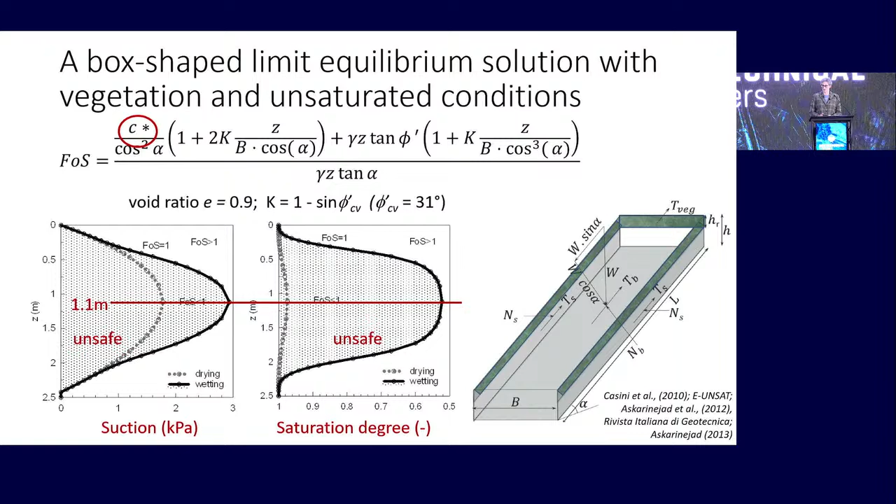We sort of looked at it in terms of a box, and we could add in the effect of suction, also if one wanted, as well as vegetation, and did some sums. We can see here that the factor of safety was just 1 at 1.1 meters of depth, with a saturation degree of 50% and a suction of 3 kilopascals. It's very simplistic, but it's a start, and one can have a look like that.

But really, we wanted to move on to slightly more advanced models, and we needed to obtain parameters to describe shear deformation and water retention in soil, which we put into the Barcelona basic model. So Francesca Casini carried out triaxial tests under drained and undrained states, and also modeled more appropriate stress paths, anisotropically consolidated with raised pore pressures.

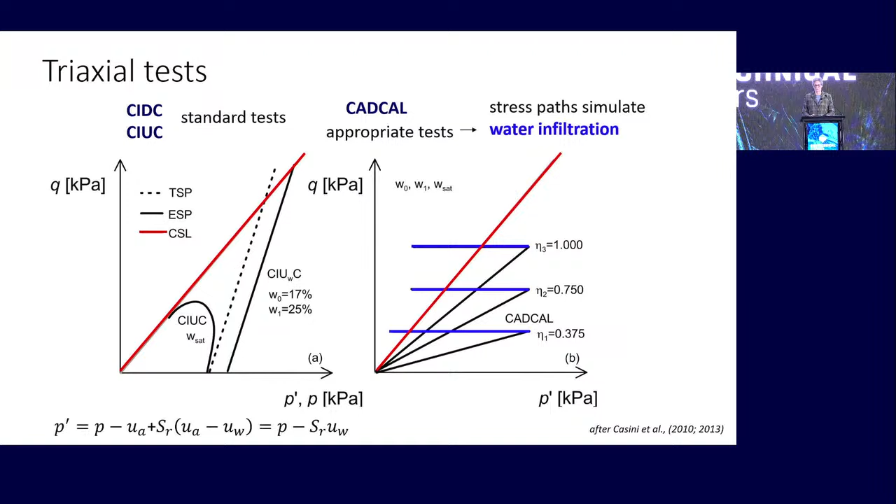We use Bishop stress to represent the effective stress. Then to determine water retention properties, Francesca consolidated specimens at 3 different void ratios, exposed to either wetting and drying or just a drying cycle in a Fredlund cell.

The water retention curves were defined according to Van Genuchten's equation. The sandy nature of the Rüdlingen soil is clearly reflected in the abrupt increase in degree of saturation at suction levels lower than 10 kilopascal. We then obtained the parameters for inputting into the Barcelona basic model and CODE_BRIGHT.

Askarinejad had conducted 2- and 3-dimensional finite element analyses, simulating the rainfall applied in the field as a flux at the soil surface, and he set up the fissures and hence drainage at the base of the bedrock, and provided water under pressure to represent exfiltration from the bedrock at the right time. And this was really very effective.

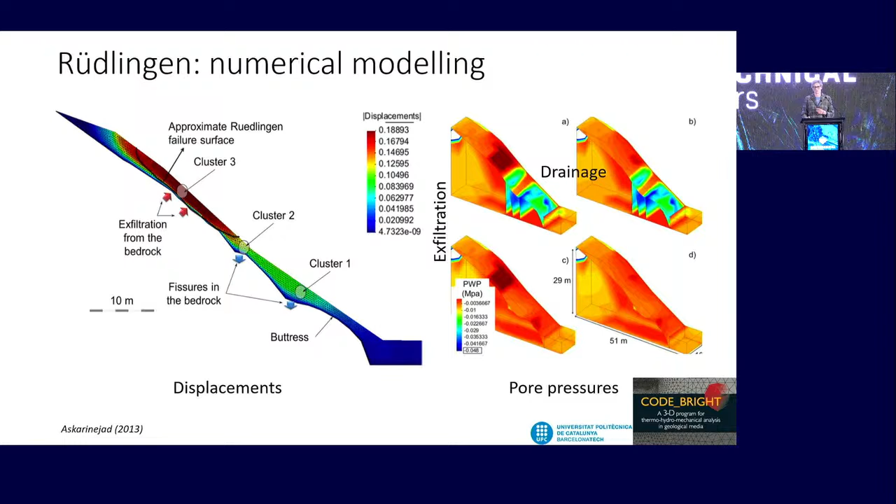You can see the water exfiltration from bedrock fissures proved to be the main trigger, causing increased pore pressures along the soil bedrock interface. We can see the 3-dimensional version as well, and it enabled us to see the formation and propagation of a failure surface. It's a first approach here, but we needed a more extensive analysis of the triggering of the landslide.

It is based on a single yield surface that could diverge from the elliptical modified Cam Clay yield locus, shown in gray, with guaranteed normality of plastic strain increments.

This could also incorporate the state parameter psi, in itself helpful when considering potential compressive or dilative volume change. The powers N and R constrain the shape of the yield surface, F, on the deviatoric plane, and its emphasis can be changed to either the wet or the dry sides of critical state.

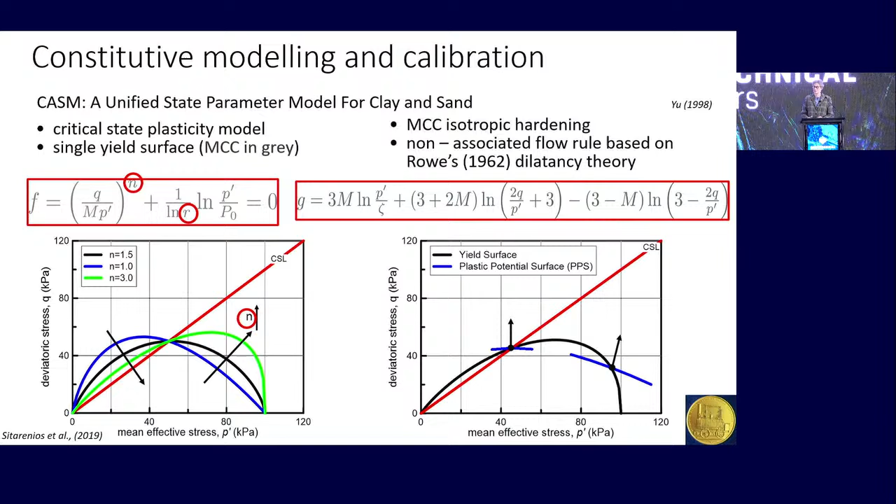This then influences the ratio of the plastic strain increments under volumetric and deviatoric conditions through a non-associated flow rule to the plastic potential G, based on Rowe's dilatancy theory.

And finally, the loading collapse curve for each pre-compression state, P0, in a saturated state, can be defined based on Bishop's average skeleton stress, which represents the nonlinear evolution of shear stress with suction.

The model was calibrated against Casini's triaxial tests on Rüdlingen soil at constant water content in both saturated and unsaturated conditions, and the increased shape versatility of the yield locus, especially an independent control of the intersection of the yield surface with the critical state line, was essential in representing failure accurately, and shows quite good agreement.

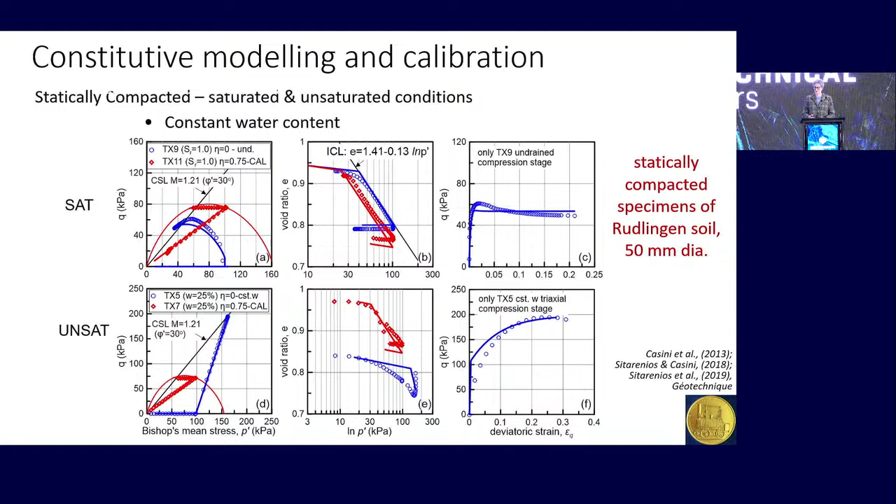At the time of 14.5 hours after the start of the rainfall experiment, the soil mantle was largely saturated and had been so since after about 10 hours.

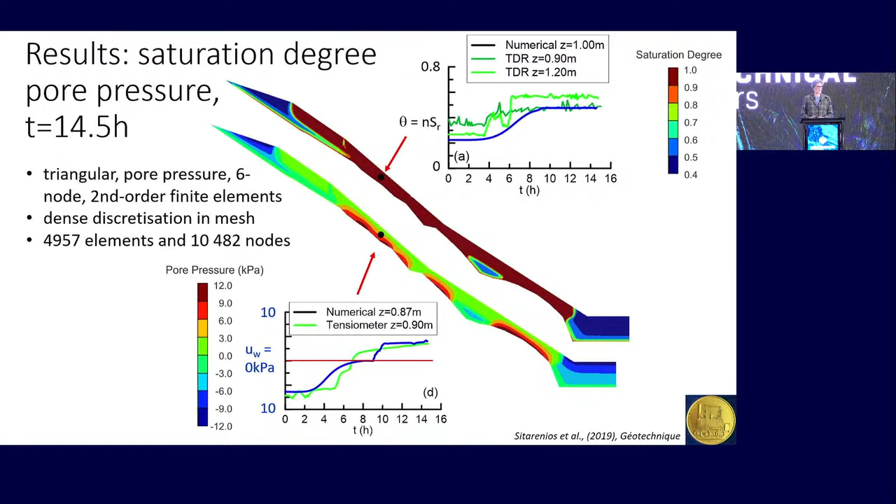The pore pressure at the point shown in the lower graph had become positive as saturation was occurring bottom up and the upper part of the slope after about 10 hours, modeling the experimental data, shown in green, in terms of time and magnitude really remarkably well.